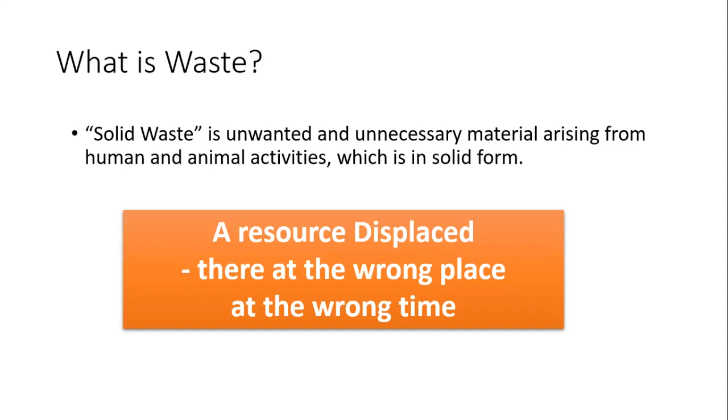Depending on different methods, such as based on the origin of the solid waste or based on the material type, there are different classification systems. Let's look at the different classification systems that we can have for solid waste management.

If you look at waste based on the origin of generation, the waste that is being generated within municipalities is called municipal solid waste. Within the municipal area there can be different institutions, and all the generated waste put together within the municipal area is called municipal solid waste.

Then there is waste generated in industrial situations, which we call industrial waste. Within agricultural setups, maybe farming or paddy cultivation, we call it agricultural waste. Waste generated as a result of construction activities is called construction and demolition waste. Institutional waste can also be taken as a separate category.

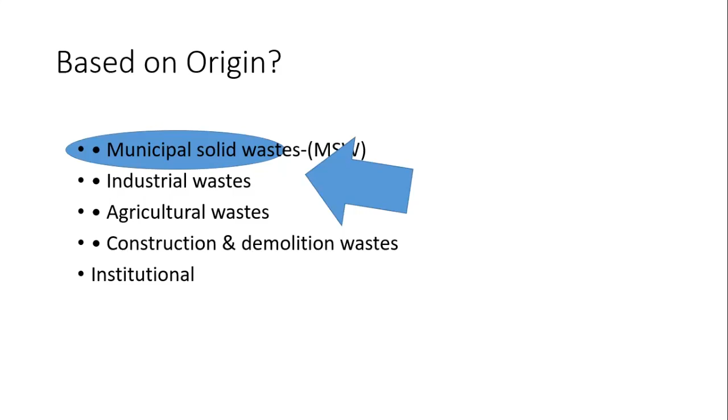Let's look at the other type of categorization, based on type. If you look at the different types of solid waste around us, there is waste that is biodegradable, that can be readily decomposable, such as food waste, garden waste, and paper waste, which are biodegradable. Most of this biodegradable waste can be recycled as well.

Then there is material that can specifically be recycled, such as glass, bottles, cans of different material like metals, and certain plastics that are readily recyclable. There is also inert waste, such as construction and demolition waste, and rock debris. And sometimes we may generate composite waste, a mix of different types of material put together, which can sometimes be difficult to recycle.

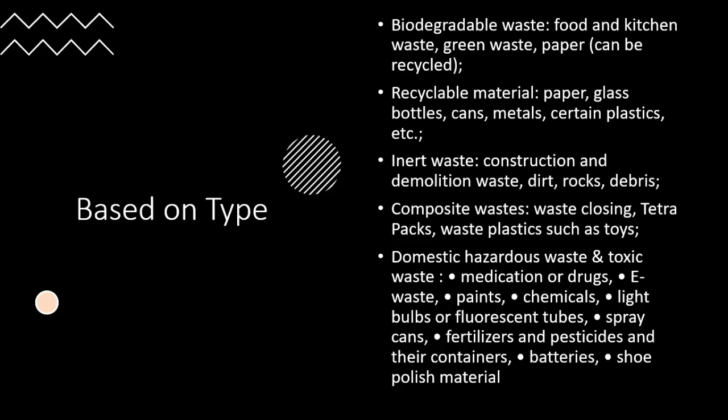Let's try to understand the legal framework within the country, how we are managing our solid waste. Generally, in Sri Lanka, solid waste is managed by municipal councils under the Municipal Council Ordinance, urban councils under the Urban Council Ordinance, and Pradeshiya Sabha. There are different tiers or layers in which this management is done centrally, and this needs a lot of resources, both financial and human.

If you look at how waste is generated depending on the population, the tons generated per day will vary according to the municipal council, urban council, or Pradeshiya Sabha, depending on the population. Not only population, but also the way the population behaves, or their way of life. You can see that in municipal councils, the per capita or per day generation is larger compared to Pradeshiya Sabha. So depending on the life pattern, or the way they live, waste generation tends to vary.

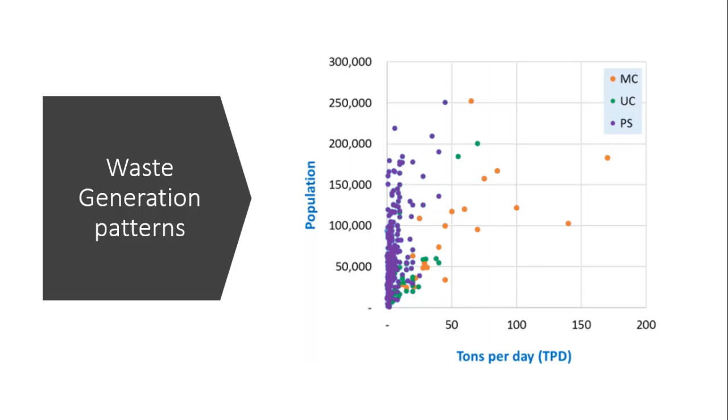This is the general composition of municipal solid waste in Sri Lanka. You can see most of our waste generated within a domestic environment comes from the kitchen. So most of the time, kitchen waste can be considered biodegradable. You can see almost 75% is generated from kitchen waste.

So this is somewhere you can think whether we are actually spending our finances, our human resources, for a worthy cause. If you can manage this problem at the domestic scale to a certain extent wherever possible, the government does not have to spend this much money and resources to solve this problem. This is for you to think, right? So anyway, we will continue.

You can see the other types of waste, that is garden waste, paper and cardboard, plastic, different types of textile, rubber, metal, glass, are in smaller quantities when you compare to the kitchen waste.

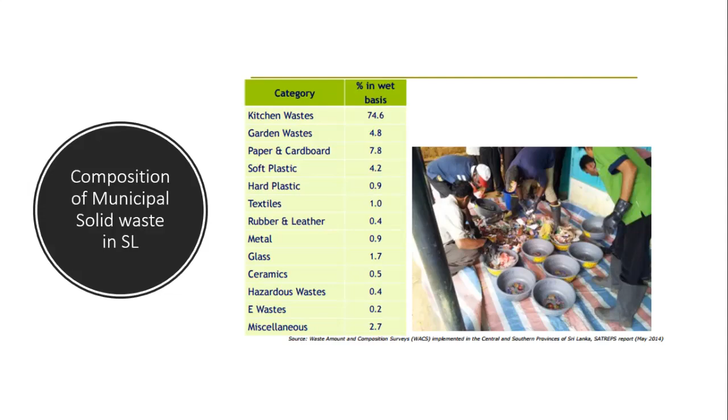Let's look at what we have created. What is the problem of the solid waste that we have to manage?

So this is the amount of waste generated considering different populations. You can see it can vary between 1 kilogram to even 3 kilograms per capita per day. So it all depends on the way we lead our lives.

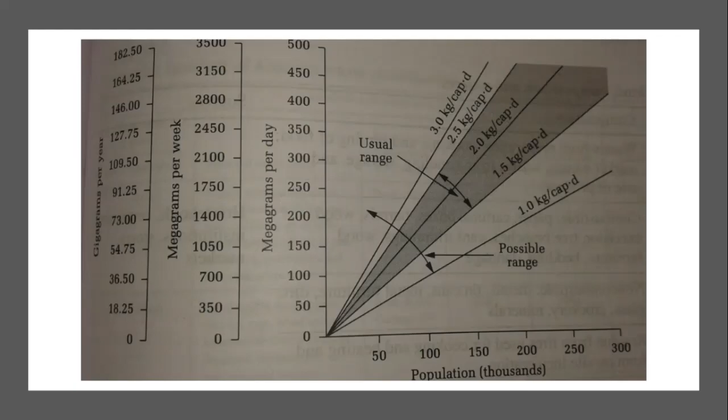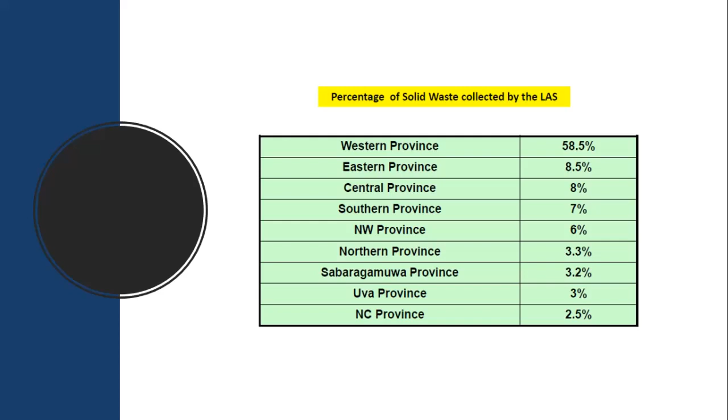If you look at the Western Province waste generation, you can see out of the collected waste by different collection authorities, Western Province generates most of the waste when compared to other provinces. With time, it is anticipated that waste generation will increase with the increase of GDP and the spending capacity of the people. The amount of waste being generated is going to increase too. So there are different elements you have to consider with respect to solid waste management.

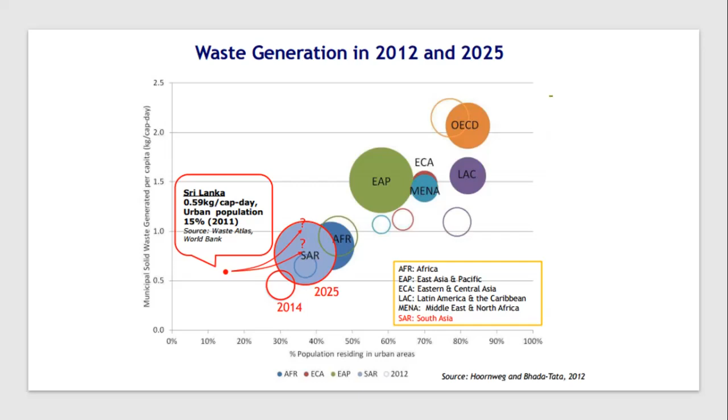So what have we done? This is the gravity of the problem if we do not manage solid waste properly. This is what the municipalities have done - unmanaged waste. In this area, the daily discharge has been estimated at 1 to 1.5 kilograms per day in urban areas, and unmanaged waste that is dumped will create almost permanent problems in your environment.

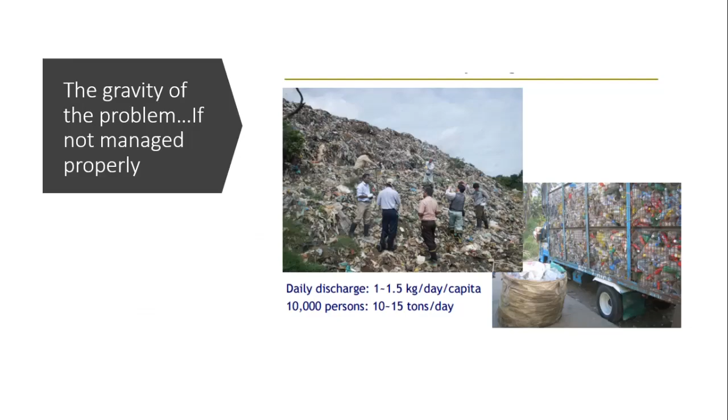So what happens if you keep dumping your waste in the environment? It will create spontaneous fires sometimes, and sometimes intentional burning will release a lot of unwanted gases into the environment. At the same time, it will create leachate - the liquid part of the waste - as solid waste gets separated over time in the dumps and released into the soil or nearby waterways. So solid waste will pollute not only the atmosphere through uncontrolled burning, but also create problems in the groundwater table, nearby water resources, water courses, and soil pollution.

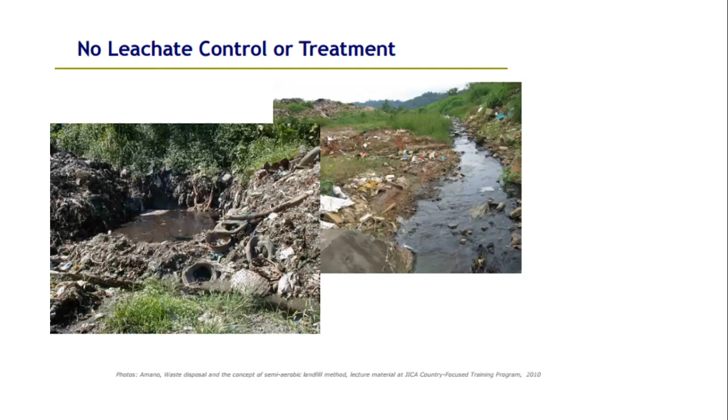So these are some examples. These photographs were taken by myself near the Karadiyana waste dump. It is a huge waste dump extending around 25 square kilometers. As a result of decomposition of waste, especially kitchen waste which contains almost 80% moisture, this moisture will slowly start leaching out over time and get mixed with the nearby waterways. This is near Bolgoda Lake.

The other issue is that most of the waste we dump without sorting - and we know the composition of waste - there is a considerable amount that is not being decomposed readily. So this can persist for long years. This is one example from the Tokyo Bay area. The photograph is taken there, but the situation in most open dumps in Sri Lanka is the same. This is even after 40 years of open dumping, and you can see the plastics.

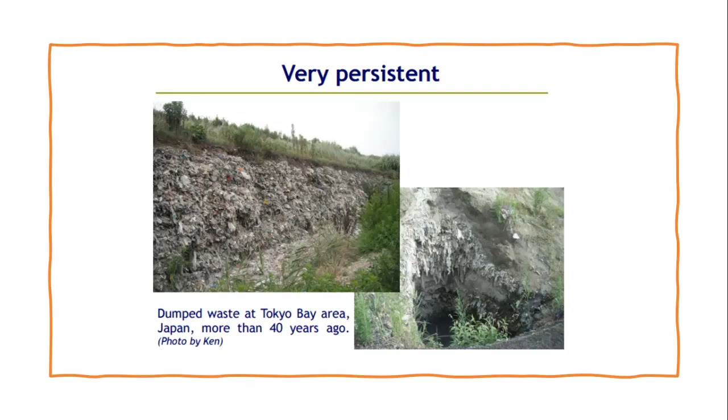In our case, we have used lots and lots of silly bags. They will remain even after 40, 50, sometimes even 100 years. We are creating a persistent problem if we do not manage solid waste. So that is why we have to consciously take a decision to manage solid waste, but there are different management strategies you can adopt. Using suitable management strategies, we have to manage our solid waste. Let's look at the waste management overview.

In Sri Lanka, we can't be happy with the solid waste management practices we have in our different government agencies, maybe at different urban council levels, municipal council levels, Pradeshiya Sabha levels. There are some successful stories, but most of the time we have created a problem and we are still creating a problem. We have not managed to tackle the solid waste generated by the community in a more effective and sustainable manner.

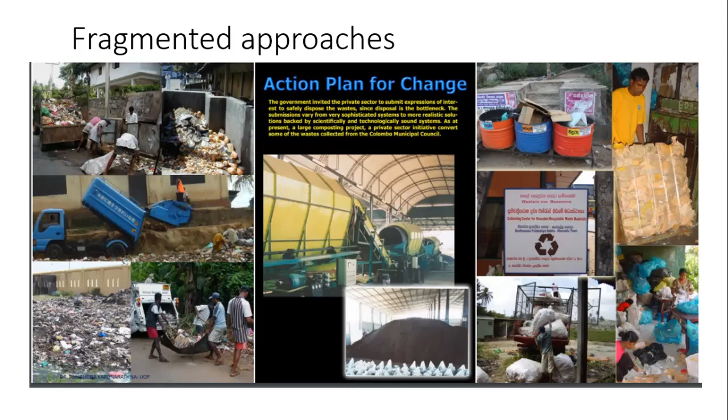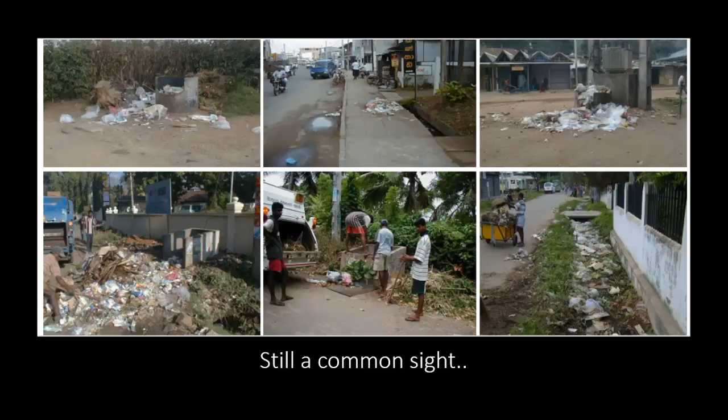Some Pradeshiya Sabhas, some municipal councils are trying to solve the problem in certain manners, but still you can see this can be a common sight in many parts of the country. And this is not something to be very happy about. These are the historical dump sites you can see all over the country.

We have, starting from Colombo, Sedavatta, Madampitiya area, Kolonnawa, and not only around Colombo but in different other parts of the country, we have created this problem as well. So there are ways that we have tried to convert these open dumps into useful lands.

But once you have polluted a land, as we saw, it will take maybe over 100 years to completely decompose and make this solid waste part of the environment. Still, you will create persistent problems.

Maybe on the surface you can create playing fields or playgrounds or some other purpose, you can make use of this land for some other purpose, but that is only on the surface, while beneath it still has the same problem. So you might use this open dump site for certain applications, certain users, but it will restrict most of the good use of this land.

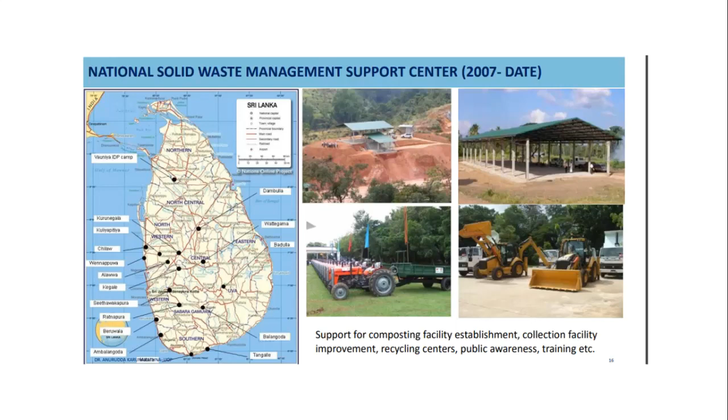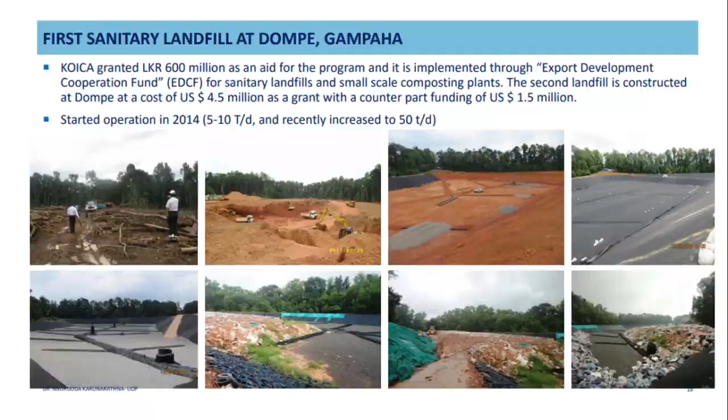When you talk about the waste management hierarchy, we always would like to start with waste prevention. If you do not have waste, that is, if you can prevent waste, that is our highest priority, the most favored option. When you can't prevent totally, then you can try to minimize. Whatever we can't minimize, we try to reuse and recycle.

And if you can't prevent, or cannot minimize, or cannot reuse and recycle, then the next option would be to recover the energy, because most material has inherent energy that can be retrieved or extracted in the form of energy which can be used again. So again, this is reusing, but in a different form. Whatever material can't undergo these steps should only be disposed.

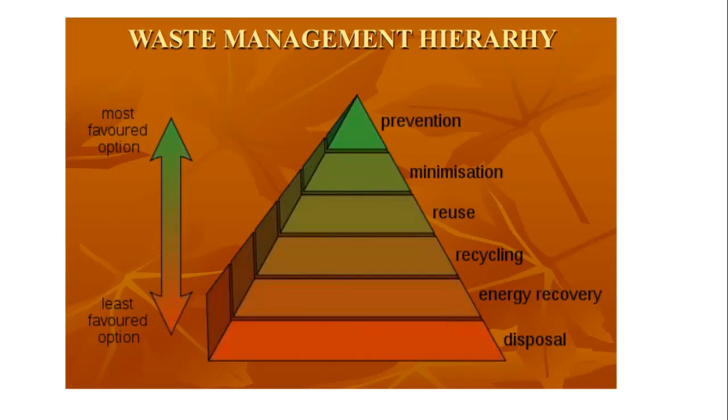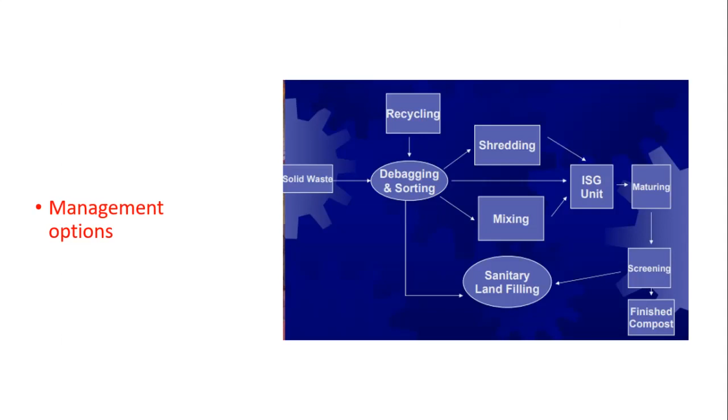But in our country, what we see is our first priority has been disposal. That is why we have created such a lot of problems in our environment. Not only the environment—when you create problems in your environment, that will create a health hazard for the people in the society as well. So these are some of the management options you can see happening in our municipalities.

Most of the different types of waste will end up being managed in different ways. For example, construction waste can also be recycled and reused, such as reusing construction waste back in construction activities. But most of the time in Sri Lanka, it ends up in the landfill. Very little has been reused in road construction and so on.

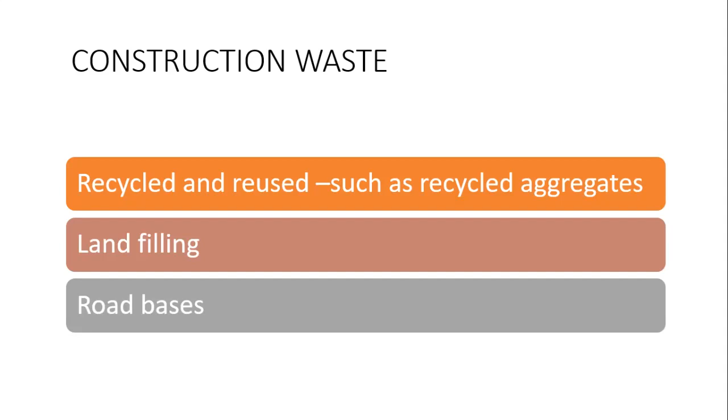But the second option is the widely occurring option in Sri Lanka, which is that we are wasting our useful resources in landfills.

When you talk about municipal solid waste management practices as a municipality, you have to tackle this problem in different stages. Usually from the point of origination, that is from the household level, you will have to collect the waste. So waste collection, after the collection, they will be transported using different mechanisms. And then if you do not recycle and retrieve the useful material, you will have to dispose them. So here you will see the landfilling.

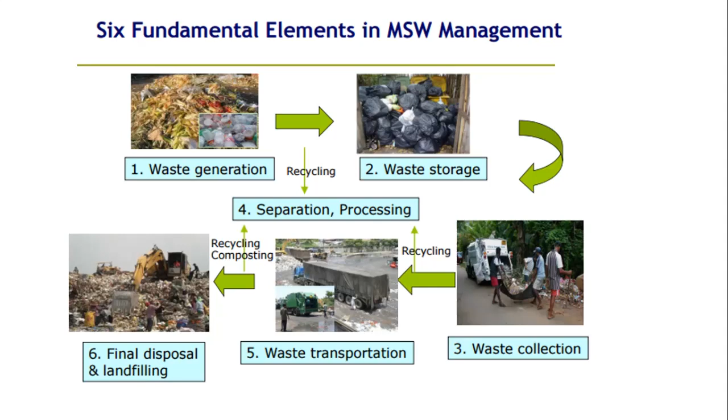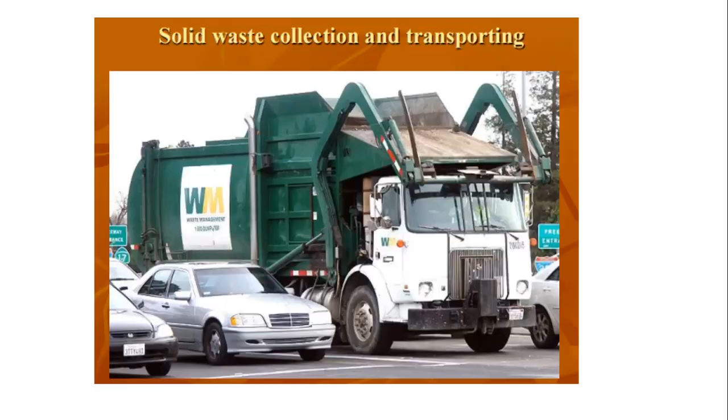Landfilling can be the last option, but before that, there are a lot of useful resources that you can retrieve for recycling and reuse. If you take a municipality, most of its resources are spent on waste collection because it takes lots of time, lots of human resources, and lots of finances. The collection is associated with machinery for transportation.

So before we go into and see how the municipal solid waste is being managed and what are the engineering inputs that is necessary for solid waste management, we will try to see this small video.

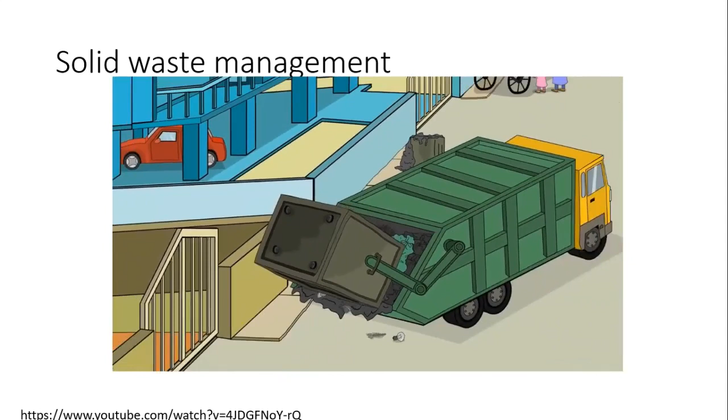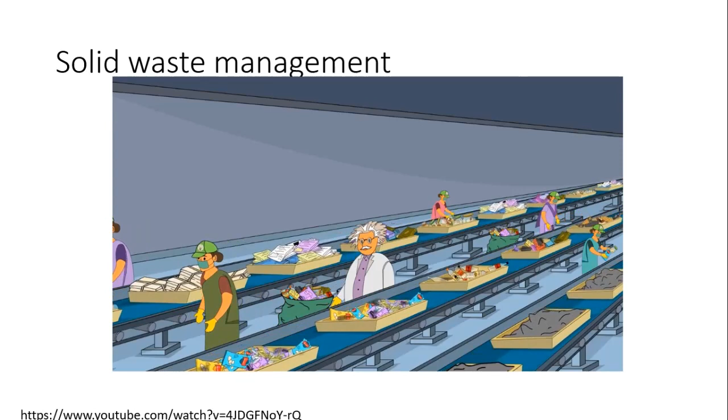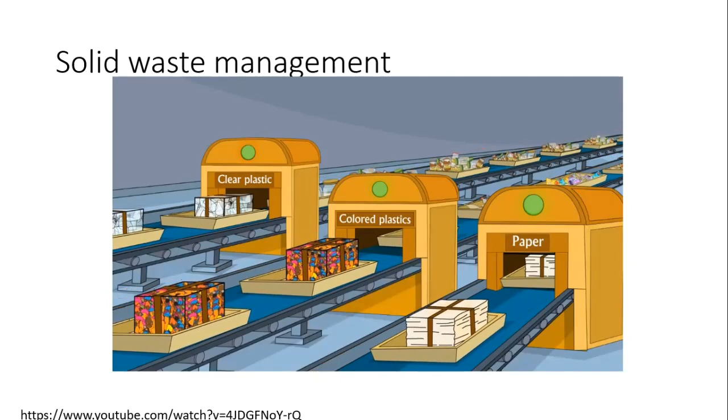Did you know that India consumes 12 million tons of plastic, 11 million tons of paper, and 2 million tons of glass each year? Have you ever wondered what happens when you don't recycle all this waste? Around 6.7 million tons of recyclable waste is dumped in India's unsanitary landfills, leading to severe air pollution and water table contamination. Are you alarmed? Well, you can make a difference today by partnering with Banyan Nation. Banyan offers professional recycling services to homes and businesses. Customers can avail convenient, on-demand or recurring door-to-door pickup services. Sign up today for Banyan's Earth Credits program. Based on the weight of your recyclable waste, you can receive cash, coupons, or even mobile minutes. The collected recyclable materials are transported to Banyan's materials recovery facilities and are meticulously sorted using scientific techniques. They're cleaned and processed into high-quality materials like bales of paper and plastic pellets and chips of different colors and sizes. The processed materials are sold to reprocessors and producers who manufacture consumer goods that re-enter the marketplace. Banyan's mission is to create a robust recycling supply chain that meets the needs of local communities. Become a partner in Banyan's sustainability movement. Contribute to the economy by signing up today at banyannation.com.

So you can see there are very successful stories from around the world. As I started, waste is a very useful resource, but as long as it is located at the correct place, it is not going to be waste. So we have to create this environment so that you will collect your waste. The collection can be by individuals, or by the municipality, the collection authority, and then convert this waste into useful resources that can be readily used in the economy again. So we call this circular economy, where you will over and over again use the same material for human use.

Let's look at the process of solid waste management by a typical municipal council or collection authority. The solid waste, especially the municipal solid waste that we are considering, 75% is generated in your kitchen environment.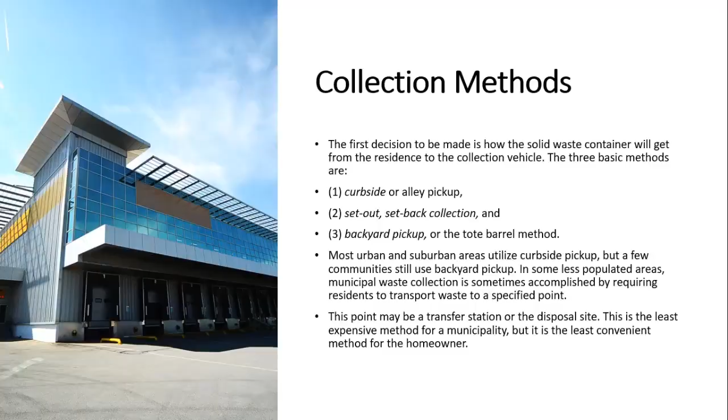Waste collection needs lots of resources. When you are collecting waste, you need to know how long your collection will take in a certain area. So you will have to do time studies to understand the behavior of collection patterns in that area.

This will be useful to determine the amount of human resources you will have to allocate, the amount of area you can serve during a certain day, and how you can allocate your equipment, vehicles, and so on. Doing a time study for a selected area is very important to design a suitable solid waste collection plan. I am going to give you certain information in these slides.

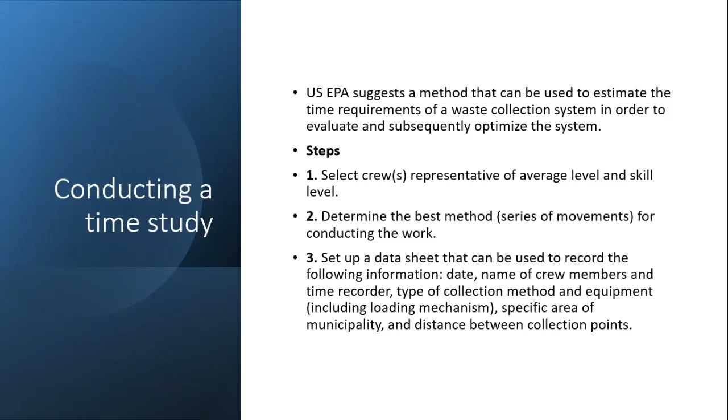I will expect you to have a look at these slides when you come for the discussion class. Please try to read them. I have put some extra information, so those who are interested can also read and try to be ready with the questions. These are some details of conducting a time study.

This is what I have taken as an example: door-to-door collection. These details are necessary for a time study. You can see, consider these blue boxes as two houses, and the arrow indicates the traveling path of the vehicle.

So we will take this as the vehicle. It will travel from house to the next house, and the people collecting the waste will have to get down from the vehicle, collect the garbage bin, dump it into the vehicle, return the container, and then get into the vehicle. So the time taken for the whole process can be calculated.

Like this, you will try to understand how long the collection time is for a given area or municipality. Depending on the way the houses are located, this time will be different. So you will get a certain idea of how long it will take to travel and collect the garbage in a certain area.

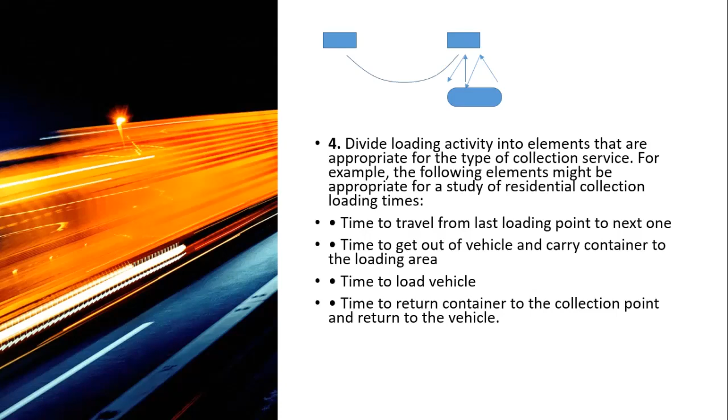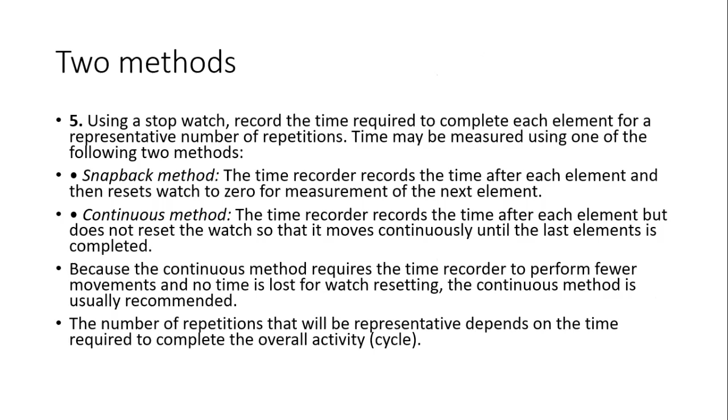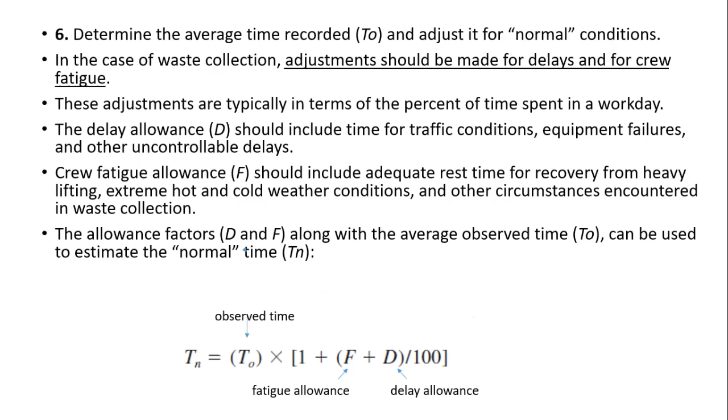These details of time studies are not very important for our discussion, but I have left them for those who are interested to read and have a look. These time studies are purely based on empirical equations, which you can use for calculating and estimating the times.

The other important element in a solid waste management plan is how you can estimate the amount of vehicles that you need to purchase or have for the collection, the amount of human resources, that is the crew size, and the amount of money you have to spend on these human resources.

Labor resources, and also the capital cost to purchase the relevant vehicles and so on - all these can be calculated, mostly using empirical equations. I am trying to leave out the details of these equations, as the scope of this lecture will not give us enough time to go into the details of these calculations and estimations, but I have kept them here in case you need them at a later stage, or those who are interested can have a look.

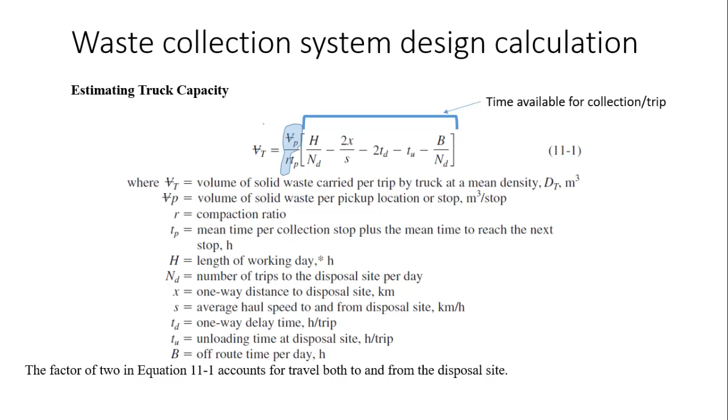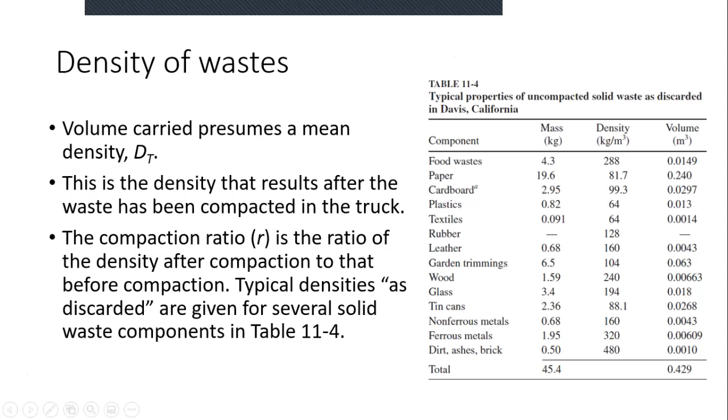There are different densities of waste depending on the component of waste. In Sri Lanka, we don't have much information with respect to these detailed studies, but you can see from different countries, the references are there.

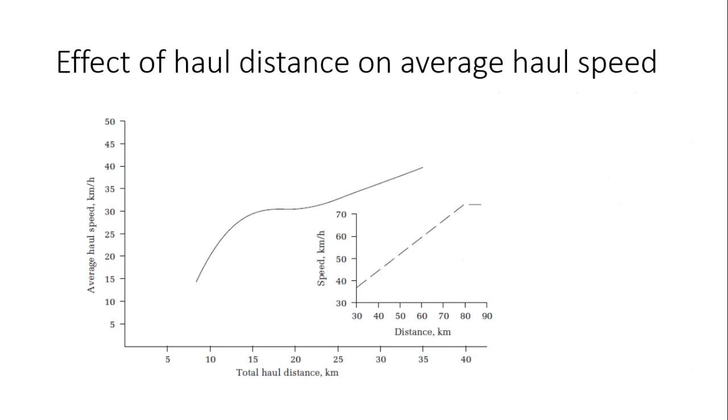You can also estimate the amount of time that your collection vehicles will take to travel certain distances. This kind of chart can be generated between the total haul distance and the average speed of different types of vehicles. This is one such graph, a hauling speed graph, taken from a reference. This is for your information, to understand that solid waste management plans can really be designed using different estimations.

To estimate the amount of time taken to collect waste from a certain area, maybe a certain locality, you can also estimate how many households can be catered within one trip of a certain vehicle. Depending on the vehicle capacity and the time of collection, you can estimate how long it will take to collect waste from, let's say, a 1 kilometer area in your municipal council.

This is important for you to allocate resources such as human resources and vehicles to collect the waste from a certain locality, to make sure there is frequent and regular collection from your community. You can see most of the resource has gone into the collection. It's a very expensive business for the government, and in Sri Lanka, it's taxpayers' money, and ultimately we will have to pay for the waste that we create.

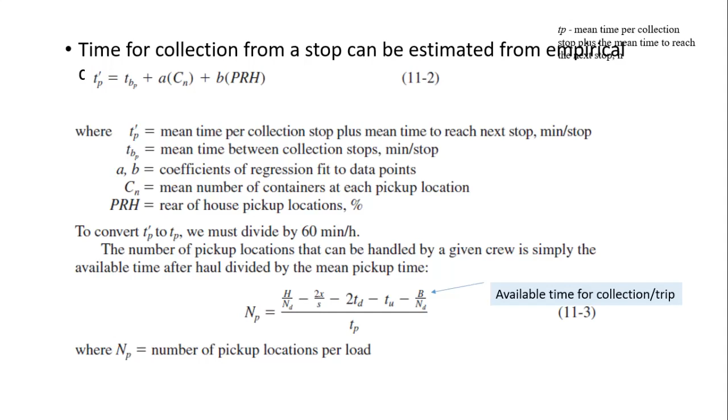I have given one example of how we can estimate the collection times and the vehicle capacity for collection of garbage. Please have a look at this example by yourself, and in the discussion class, depending on your questions, we will go into the discussion. If you are interested, we can discuss how to estimate these disposal, collection, and disposal plans.

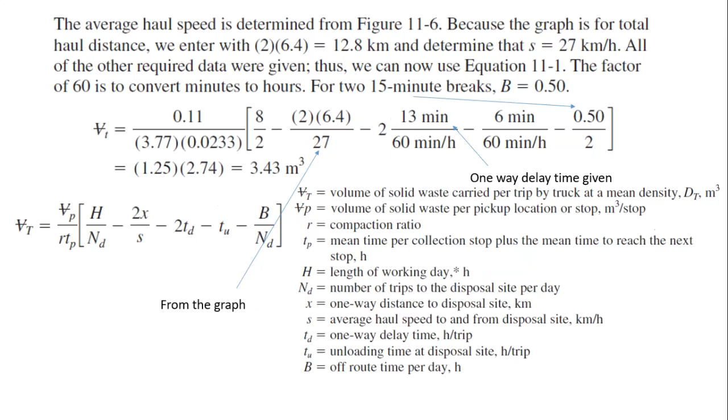I will go into the next section. This is the example calculation I have put here.

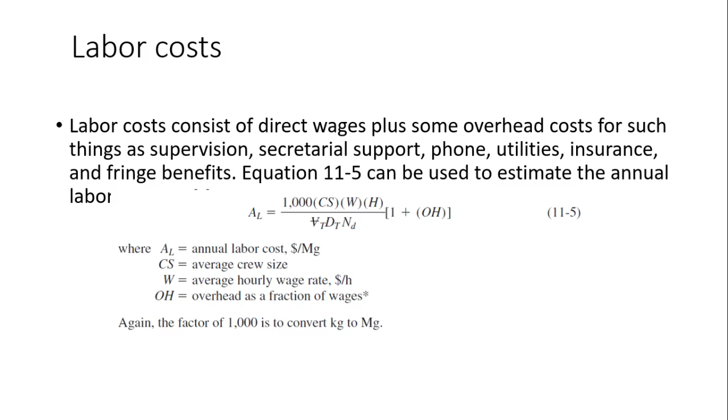Estimation of labor cost can also be done based on empirical equations. You will need to know how much the labor cost, that is hourly wages, is for the crew. Provided you know these details, you can also estimate how much cost is associated with the labor used in collection. One example is given here as well.

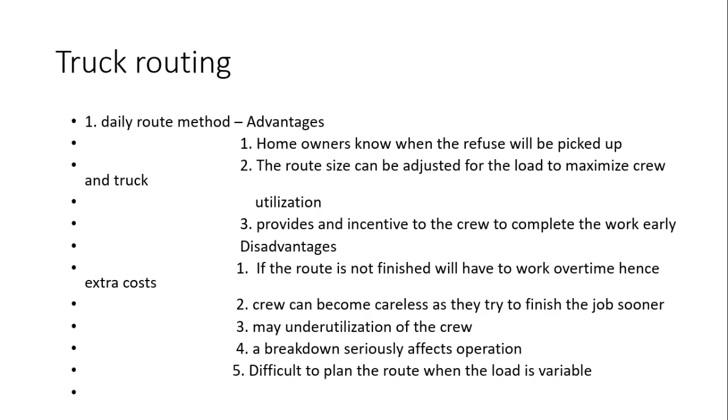When we want to collect the waste from a certain locality, usually the trucks will travel along the roads, so you will have to create the minimum distance path to collect the maximum amount of waste during a visit. This process is called truck routing, that is, you identify the shortest route that you have to travel to collect the maximum amount of solid waste. Depending on the road network you have, you can estimate the path your truck will have to take. This process is called the truck routing method.

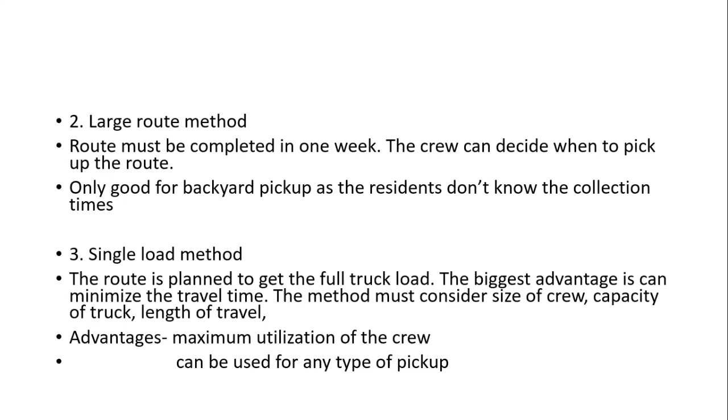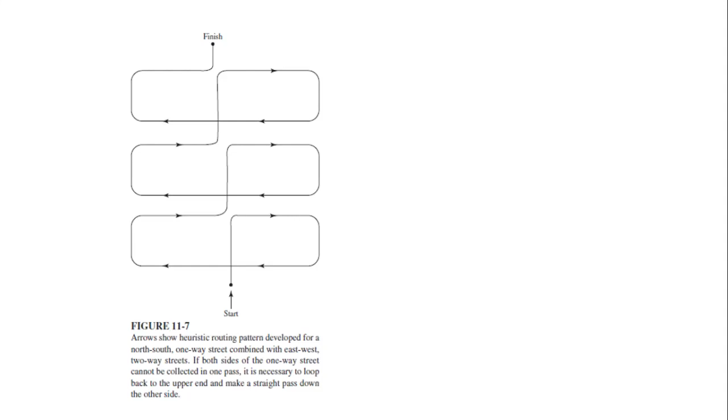Depending on the type of collection and the working conditions of the crew, this routing system can be different. You identify what kind of travel path to take. If you start from your yard, that is the vehicle yard, what is the route you can take to collect the amount of waste necessary to fill the truck within a certain trip? I am showing these details not for you to do detailed analysis using these methods, but for you to understand these systems are also there, and this is how usually the management plans will be designed.

So once the waste is collected, if it's collected unsorted, the next step would be sorting. This is also a time and resource consuming step of solid waste management. But in the process, you can separate and retrieve useful resources which can be recycled, reused, and the rest can be converted into energy by incinerating, and the rest can be sent to landfills.

So landfilling should be the last option in a good waste management plan. This landfilling volume is going to be very minimal if you follow this good practice of waste separation and reusing as resources.

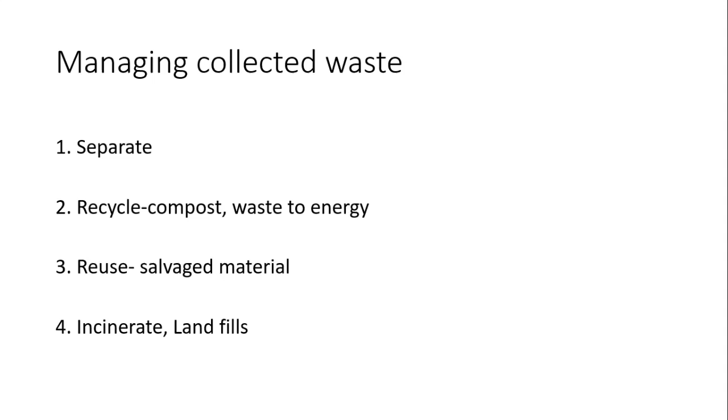So we will try to look very briefly at different solid waste management practices. The most easy or convenient type of solid waste management is associated with the decomposable part of your waste, the waste generated from kitchen environments, which is very suitable for composting.

So there is a science and engineering in composting as well. We will try to see only the key elements of composting. As we know, the process of composting is the transformation of organic material into biologically rich substances that can be reused in agricultural practices. This decomposing process happens as a result of different microorganisms and organisms.

Invertebrates such as insects and earthworms are working to convert this decomposable material into biologically rich substances which we call compost, and microorganisms are also working really hard in this process.

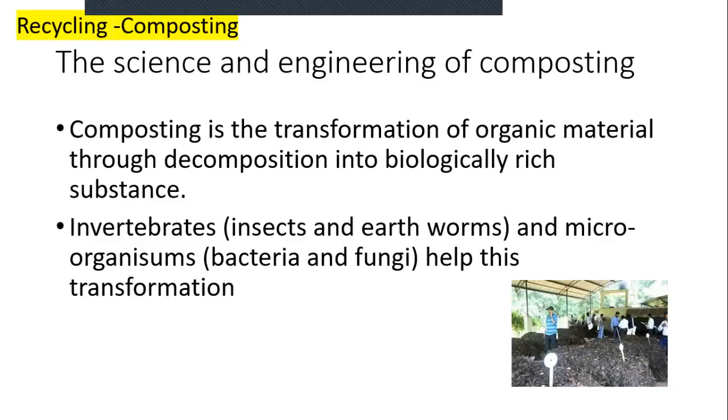Now if we want to engineer the composting process which is happening anyway in the environment, we are trying to create favorable conditions for these living machines to convert the compostable solid waste into compost. So we will see how it can be done.

We know if you do not manage the decomposable part of your waste and just dump it somewhere, it will create problems around our environment, as it can emit different gases and release leachate. So we need to convert the waste into compost in a certain scientific manner. Composting is going to help us manage our waste so that we do not create environmental problems.

And the composting process is going to give you very useful resources that can be used in agricultural activities.

But we have to understand the input quality of your waste is very important for quality compost. That is, you have to make sure you do not mix your waste with hazardous materials, such as in your domestic environment, where we sometimes tend to mix things like batteries and different chemicals used domestically.

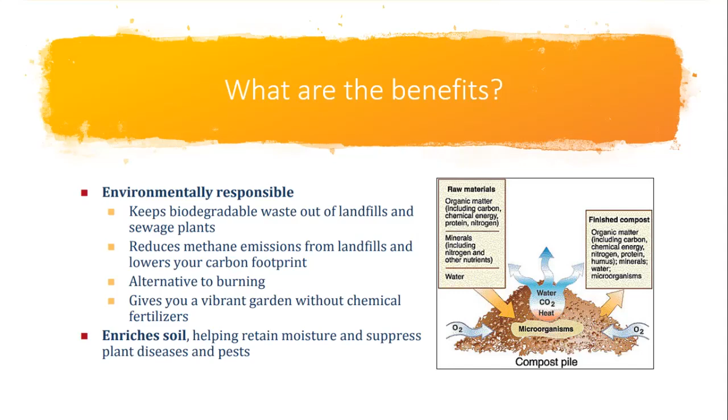So if you mix hazardous material with the compostable part of your solid waste, the compost you make out of it is going to be contaminated with that hazardous material. Contaminated waste generates contaminated compost, which is not suitable for agricultural activities. So you always have to make sure the waste is properly sorted before composting.

And if you want to design a suitable or proper composting facility, you have to pay attention to the composition of your waste. The waste you use for making compost needs to have certain attributes, and these are the considerations you have to pay attention to.

We have to make sure there's a certain carbon to nitrogen ratio in your waste so it can be readily converted into compost. Generally, the C to N ratio, carbon to nitrogen, should be maintained around 20 to 1 or 35 to 1.

Because this decomposing process is done by living organisms, for their growth and reproduction we have to provide a carbon source and an energy source. Therefore, the carbon to nitrogen ratio is very important for an effective composting process.

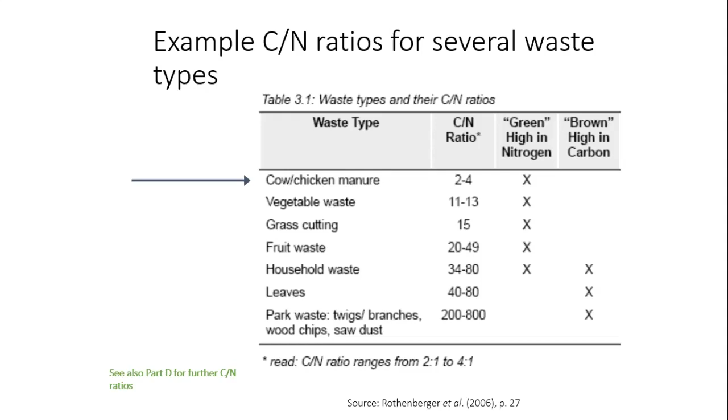Let's look at the different composting methods that can be used when generating compost at commercial scales. This is large scale composting, and you can specifically see 5 different types of composting methods depending on the available resources and space, and you can select the different method of composting.

Most municipal councils in Sri Lanka use the windrow method as a popular method. That is, building thoroughly mixed waste material into small long heaps, so that you can provide sufficient air, and also facilitate time to time turning for proper maintenance of the conditions mentioned earlier.

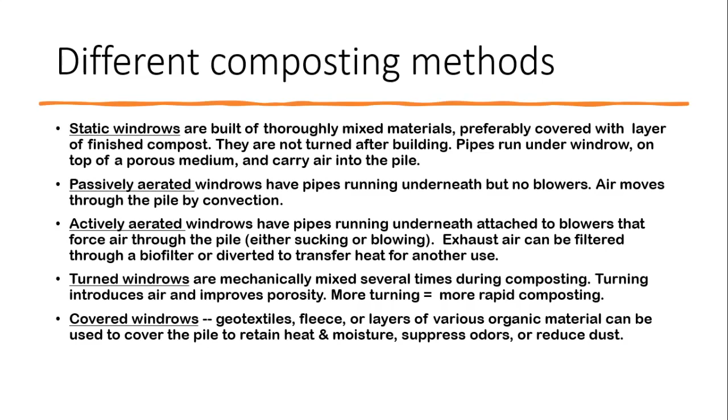Then we can have passively aerated windrows, and we can have actively aerated windrows. All these different types will facilitate different conditions so that you can optimize the conditions necessary. This will facilitate more rapid decomposition, and the composting process will be accelerated.

So let's try to understand how the decomposition of the compost, or the composting process, happens using microorganisms. Usually in this process, the living organisms break down the organic matter into primary materials that can be readily used as fertilizer. Depending on the type of living organisms, and the characteristics of the waste, we can see 3 distinct phases in composting.

The first phase, depending on temperature, we call the mesophilic stage, where the temperature of your waste increases to moderate levels. This temperature will be there for a certain time period, until the reactions occur, meaning the microorganisms start working on your waste, converting the organic waste into decomposable material. After some time, the temperature will change into the thermophilic state.

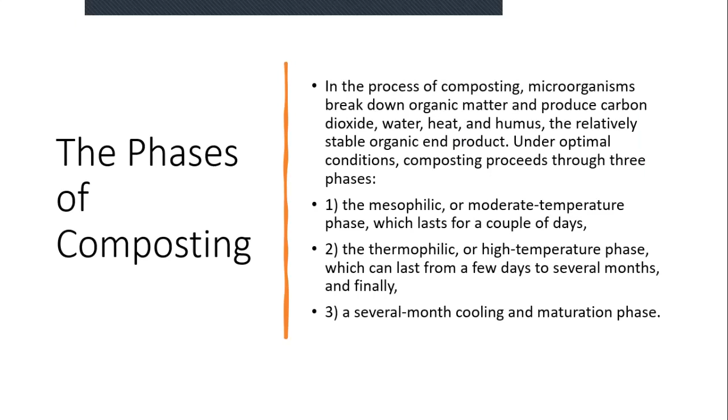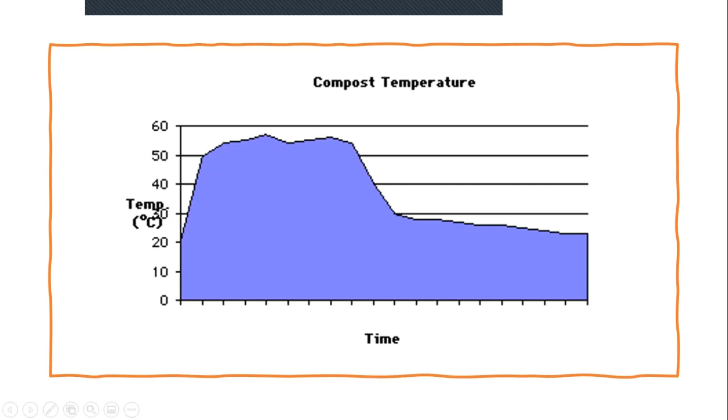Then the temperature goes higher and higher in the pile of compost, and the type of microorganisms shift to a different variety, ones which can live in higher temperature. We call them thermophilic microorganisms. They can survive in higher temperatures and they will further break down the organic material.

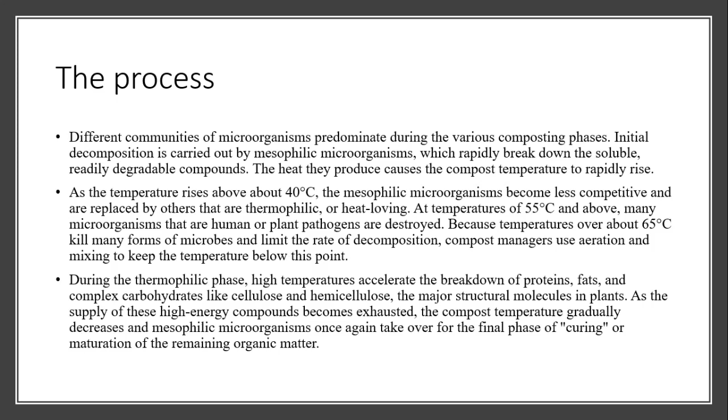As we indicated, maintaining the appropriate carbon to nitrogen ratio in the solid waste being used for composting is very important, because it will allow the correct conditions for the microbial population. This will make sure the microorganisms have the correct food source and energy source to function at the optimum capacity in the given environment. The ideal ratio would be between 25 to 35. So what will happen if you do not provide a sufficient C/N ratio?

If the C/N ratio is low, that means your carbon is less and nitrogen is more. Nitrogen will be supplied in excess, and it will be lost as ammonia gas. This will lead to stinking, or undesirable odors, in the composting process.

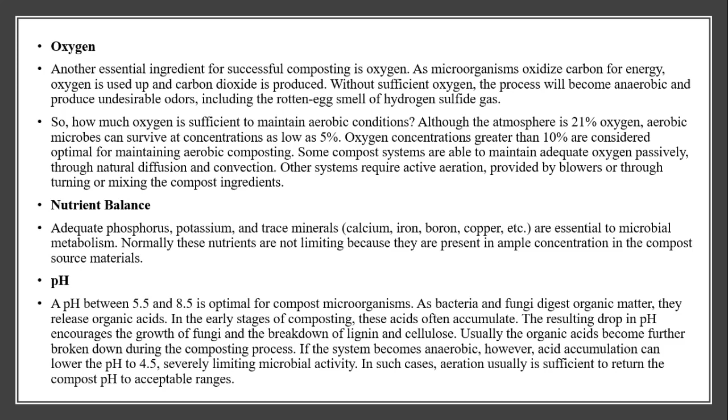And depending on the stage of your composting process, we saw that this decomposition process will take a certain time and undergo certain temperature changes. So if your waste does not undergo the full cycle of decomposition phases, the compost can be categorized as immature and mature compost.

If the complete cycle is not completed, the compost can be termed as immature compost. This immature compost is not suitable or ready to be used in plantations. It might have a higher temperature and living microorganisms that can harm the plantations. So you have to wait until the compost completes the full cycle of maturity.

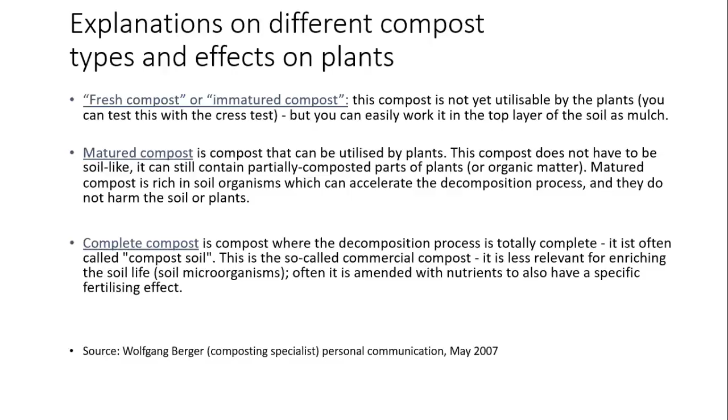So let's look at the next option of solid waste management: the attributes of a sanitary landfill. We know that waste which cannot be recovered and reused as a useful resource has to be managed in a certain manner. If we do not have the technology to extract the material and reuse and recycle, there should be some option for us to take.

So that is the last option: landfills. Not just dumps, which will again create problems in the environment and in society. Sanitary landfills are supposed to provide minimum impacts to the environment and society. Let's see what is a sanitary landfill.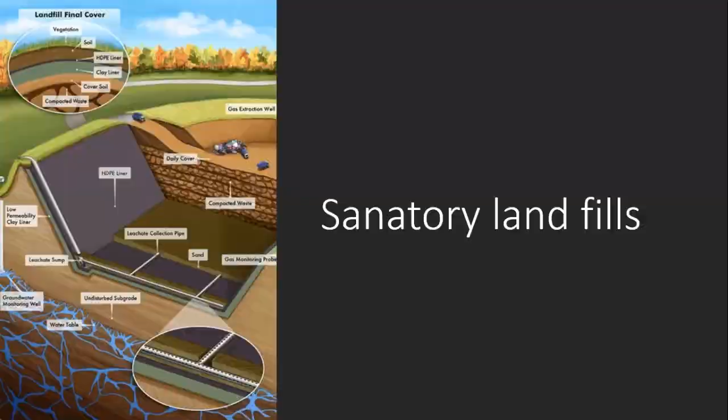In contrast to open dumps, sanitary landfills will not create atmospheric pollution. If you compare the difference between a solid waste dump and a sanitary landfill, a dump is an uncontrolled dump causing hazardous impacts to human and environment, in contrast to a controlled landfill.

It is a dump with covering of waste, but still an engineered landfill is the best. It is the form of a controlled landfill plus engineering measures to limit the impacts to the environment in the form of gases and liquid waste.

Sanitary landfills will provide the best option of managing waste that cannot be managed in other ways. That is the safest form of disposal technique for solid waste. It will make sure it does not create problems in the environment through release of gases, and it will not release leachate that could pollute the groundwater table.

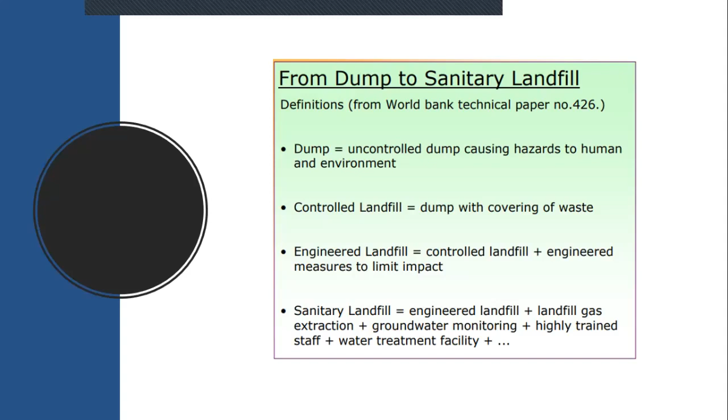We have discussed the impacts of dumps. What will happen in a dump? When exposed to rain, it will absorb moisture, and in the presence of moisture and decomposable material, the composting process will happen when you have organic waste in your solid waste dump, which will emit gases to the environment and also create leachate that can pollute surface water bodies.

As well as groundwater. So in engineered or sanitary landfills, you have to take care of the emissions and leachate so that you avoid surface water pollution, groundwater pollution, and air pollution, by providing mechanisms to take care of these problems.

So this is one very good example from our own country, where we have created a sanitary landfill in the Aruwakkalu area. This is the site. Earlier it was used to mine calcium carbonate necessary for production of cement. After the calcium carbonate is mined, the area has been abandoned, so this area has been turned into a landfill. It's an engineered activity and it's a huge investment and cost.

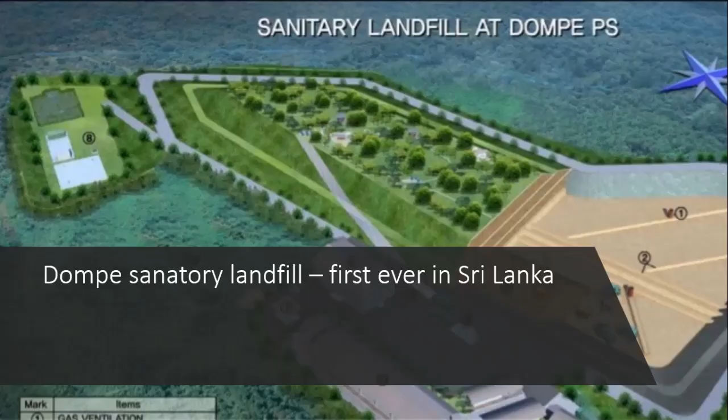Let's look at some of the other landfills that we have in Sri Lanka. This is the very first sanitary landfill we created in the Dompe area. This is how it will look like once the landfilling operation is completed. You can convert that into useful land, but still beneath you will have the waste.

So let's look at how a sanitary landfill can be created, and what are the components. As I indicated earlier, we have to make sure emissions to the air and emissions to the soil are eliminated, so that it will not pollute groundwater, surface water, or the atmosphere. So to cut off the leachate that is being generated in waste, you have to provide sufficient barriers.

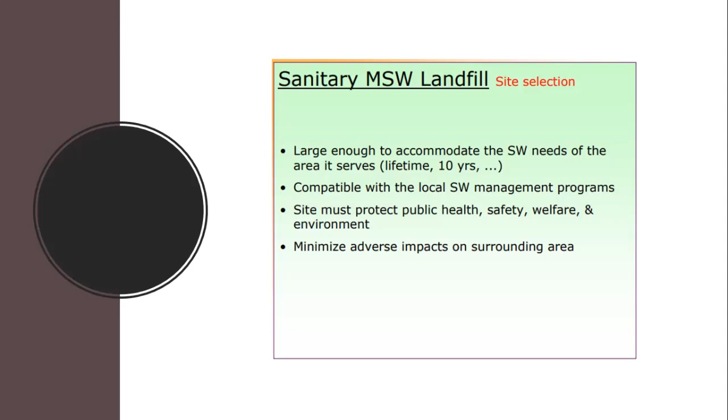It's not an easy job. We will have to undergo a long process when we are trying to develop a sanitary landfill. The first challenge is to find a suitable land, because this is a long-term process and it needs a large, considerable area. You have to select the site appropriately, and the site usually should be away from human settlement, so that it will not interfere with day-to-day activities of the society, and also it will provide suitable surroundings so that pollution can be prevented with respect to the soil, groundwater, and the atmosphere. So you create a sanitary landfill mostly away from human settlement.

Also, when you select the site, we have to be mindful about the distances of transportation of the solid waste. As I indicated, usually it has to be away from human settlement, but it should be at a distance that will not be a huge additional cost with respect to transportation. So you have to locate the site in a way that you consider land availability, but also make sure of the hauling distance — the distance that you have to take the solid waste using different transportation modes — which will also reduce the hauling costs associated.

Also, you have to pay attention to the rainfall and wind conditions, hydrologic conditions — that is the surface and groundwater — and also very important geological conditions. You can't be locating your sanitary landfills in areas that are prone to landslides. Also, you have to consider the ecological conditions of the area; they should not be ecologically sensitive areas. So you will naturally see you have to do environmental impact assessments for the sites that you want to select for sanitary landfills.

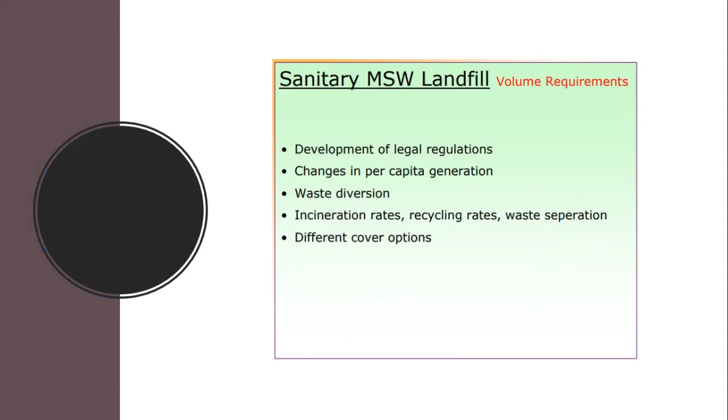Also, you have to consider other aspects such as the regulations and legal requirements. When we consider the facility location, as indicated, we have to have other associated facilities. You have to provide a leachate treatment plant to treat the liquid part of the waste, and also a certain mechanism to manage the gas generated — the methane burning process — that is the gas management and treatment system.

Also you have to construct access roads for the transportation of machinery and vehicles, and also consider the economics of your sanitary landfill — that is, area versus the height you can go, what kind of height you can achieve, and what extent of the land area can be utilized for the waste. Other considerations include administration aspects related to the waste management facility, because this is a long-term operation, you will have to build buildings and associated infrastructure has to be facilitated.

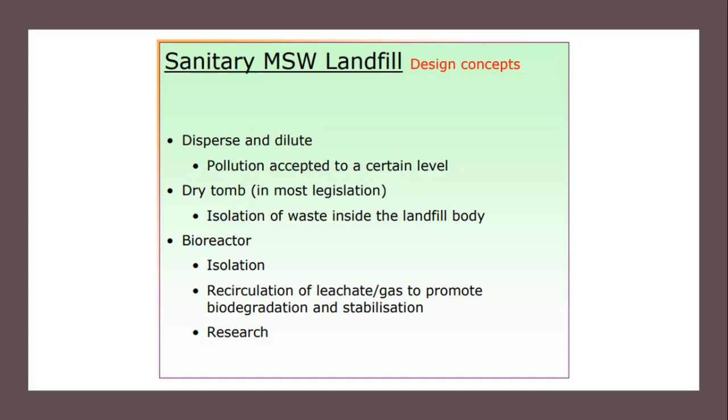Maybe you can extract and refine methane and use it as an energy source. It can be given to houses near the sanitary landfill site for cooking purposes and other purposes. So these are called the bioreactors. These are not inert dumps where you monitor it so that pollution is prevented. You are going to create, or take some use out of, these landfill sites.

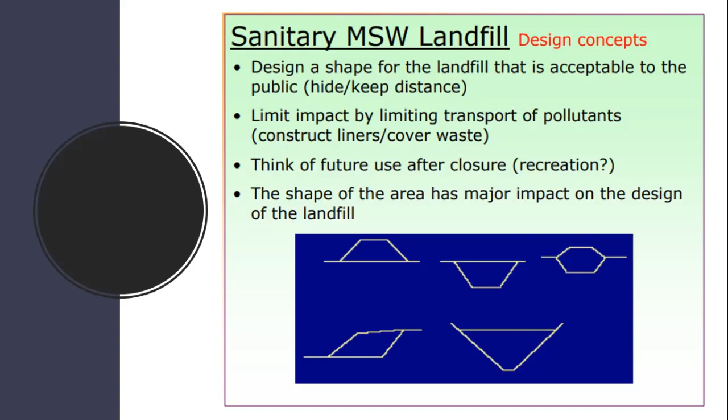There are different types of forms that you can create this landfill into. You can make them above ground, at ground level, subsurface, or a combination of those. So depending on your available land form, and depending on the topography in the selected area, you can select what type of landfill you can go for.

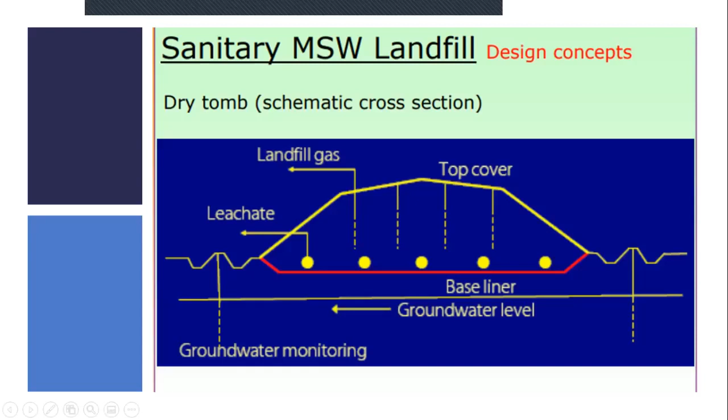Again, you can see different elements of different shapes of landfills and how you can place the different elements: the liner system, the bottom cover or bottom liner system, and the top cover. You can see here your leachate collection system, as well as the gas trapping system, has to be installed.

Since sanitary landfills are huge structures that will be there for over a long period of time, we are going to have certain impacts on the environment. We are trying to reduce the impact of solid waste that is being created, but at the same time, because of this facility, it is inevitable that we create a certain impact on the environment. So this can be considered as a project which needs environmental impact assessment.

It also has to go through the official path of obtaining permission, doing a preliminary design and preparation of design documents, because it is associated with a huge construction activity as well. So these are some of the considerations in the design process of the sanitary landfill.